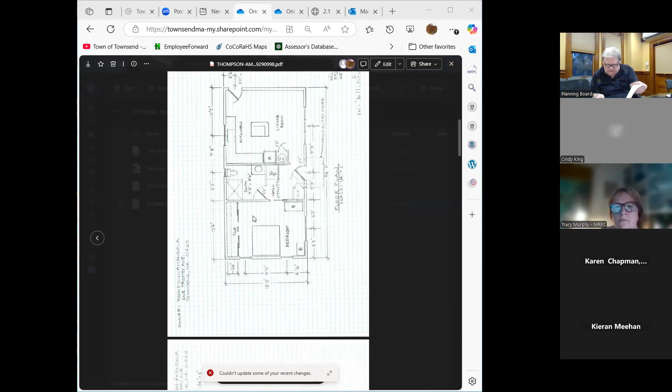Would you like one of them? I do have a copy here. He's only got the application. That's the plan, here, I'll give you this. I got the copy online.

This is probably the most useful one, you can talk about the driveway and all that. Is it an existing structure now? No, not at all, it's a new one. It's a brand new structure, yeah.

Outlined in the back pages there in red. The way we wrote the bylaws was that anything outside of the existing structure would come to us for review, to make sure there's good parking. But this was a detached unit. Detached, yeah. So Billy, if you want, just give us a little rundown.

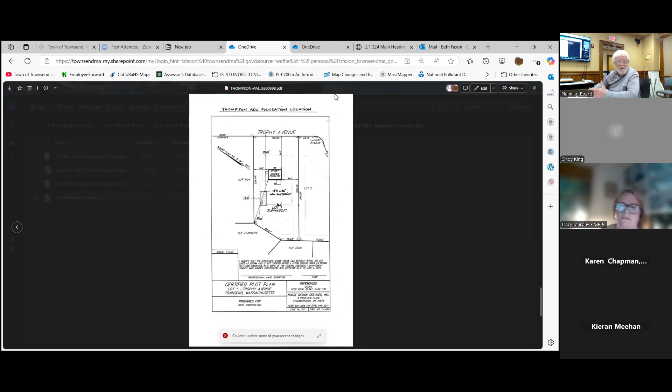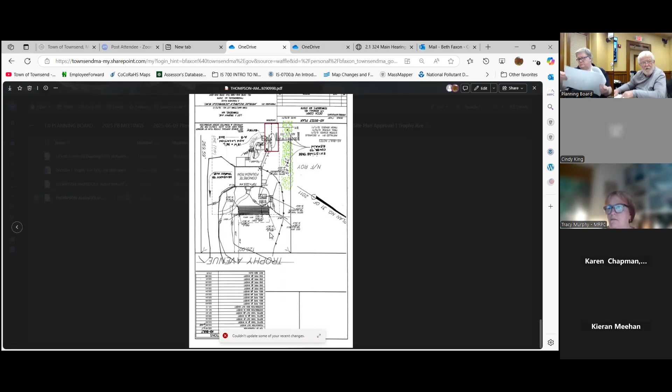I will. It's, you know, for an in-law, but there isn't those anymore. I've had a plan of attack there. We're gonna actually run the sewer into the basement to an ejector pump, which you can do if it's 25% or less. So this is a 4-bedroom septic, there's 3 in the main house and 1 in the ADU, so that all works pretty well. They've thought this out and that's where they want it. It's probably the least obtrusive place you could ever be. The next backyard is heavily wooded, and it's actually a house on Haynes Road.

This is, you know, Trophy Ave has like 5 houses on it, it's a cul-de-sac. The structure is 648 square feet. I think the main house is 17 something, and it's about, I don't know, 25%, not anywhere near the 50%. It's 1 story, it's got a kitchen/living room, a bathroom and a bedroom in it. It's on slab, no cellar. It'll be so well insulated, you can heat it with a match. No full basement, no, trying to keep the cost down.

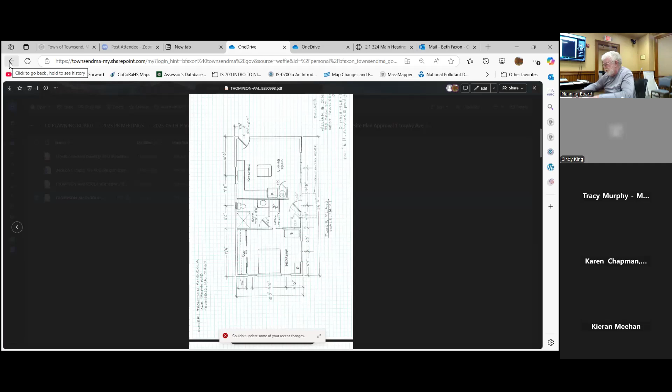I did Title V last Thursday, and that's all fine. The system looks good, it's not really that old.

Is it gonna match the style and materials on the existing house? Yes, the siding will be the same, it's vinyl sided. It's nothing too elaborate, but it's absolutely gonna be the same color and trim detail that the main house has. Well, I don't even see where it'd be visible from the roadway, actually. It really isn't. If you went by quickly, you could probably see the gable end, and then there's only a little narrow, open spot to the end of it.

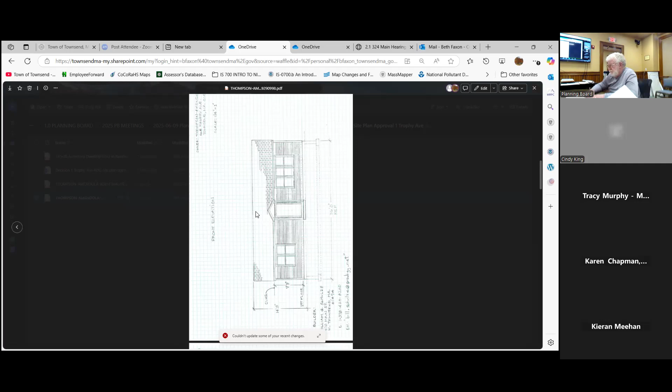I don't know, there's not a lot to it, this one. That's exactly what this is for.

Now, I know you guys are reviewing the plans in front of you, but Robert, do you have any thoughts or questions? No, I think this is what we were hoping to see happen here. Well, it's perfect. She couldn't have done a detached unit in the old rules, they had to be attached, and the maximum was 800 square feet. So we've actually been dealing with this since the fall, but with all the stuff coming through in January, we kind of put it off till spring. Sure, I see that it complies with everything we were anticipating.

So there are some questions about cover, towards the back of this there's ample wooded area. Cover, like making sure you're not putting it on top of somebody. Screening, trees. Okay, we have some pretty good natural screening there.

So you're on well water here? No, this is town water. It says right here, served by... I made a mistake on one of the forms. Beth just brought it to my attention. Okay, so then you're gonna contact the water department, so that's gonna be fixed. I don't know, it's kind of an interesting situation.

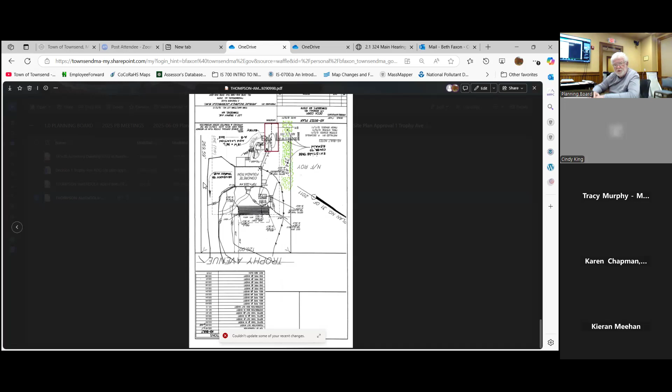I'm not sure how they do that. So the water comes into the house and then it's gonna be fed off the house. I don't really know how you'd... the well water or? Town water. Well, that's probably why it says, have you contacted the water department? I just wrote no, not applicable, because I didn't realize, I don't know how we're gonna do this. Well, this needs to be fixed. I didn't realize there was town water out there, because it says there's no town water.

And now you're saying there is town water? You said the application stated the property is served by... I made a mistake there, so it should say yes.

Okay, so we were talking about changing that. We got too busy so that needs to be fixed earlier on. And then if it's yes, then you need to contact the Townsend Water Department.

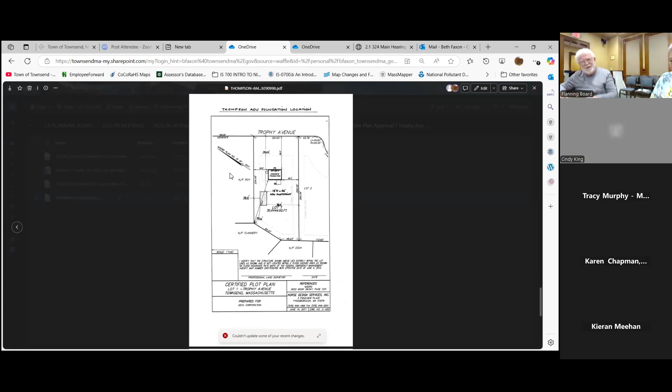I'm trying to figure out what for. Well, contact them and they'll tell you, since this is the first one. I don't know if they're gonna know. So the water line comes into the house, yep, and then it's gonna be fed into that addition. But the water department might have specific requirements of going from that house to the other house.

Well, there's other issues here too, because right now the new bylaw relieves this necessity kind of thing, and so now it's by right, so a lot of people will be using them for rental income. Yeah, that's true. In that regard, it's probably be beneficial for you to have separate water and separate electric on these units.

Because you could get into some legal issues with that. You can, although, you know, if you rent a place and you don't have the water separately metered, the landlord pays for the water in any apartment house. That would be true with electric too. That happens almost universally. I'm just making you aware of that.

I didn't anticipate that avenue. I'm absolutely gonna touch base with them, but I think they'd be pretty disheartened if someone told us we had to run a separate water line in so we could meter it. You know, that starts to shoot the budget out of the water.

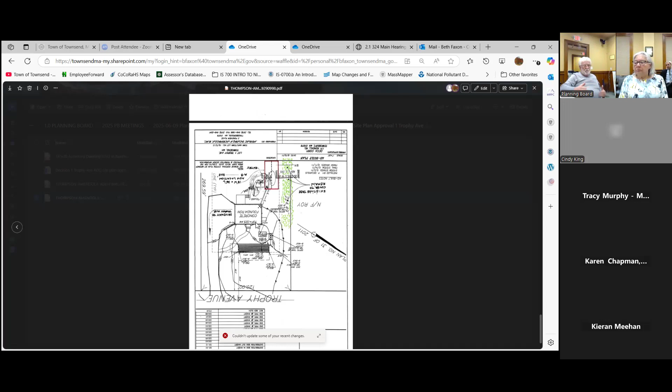So that's interesting. You come to another point, whereas they still have the same capability if they're attached, basement, addition, or whatever, but they're going to the same structure. I'm just not sure exactly. You'd probably have to separate it somewhere inside and double meter it, or sub-meter the panel. Well, a lot of this is beyond what our board can do.

I understand, I appreciate it. So, Hartley, any thoughts, comments, questions? No, I think everything here is covered. It's gonna tie into a septic tank.

I've never built a house before, so forgive me for this elementary question, but how thick and how deep will the concrete foundation be?

This foundation is on the smaller side. It's required to be 4 feet below finished grade for frost protection. So this is gonna be roughly a 4-foot high foundation with a 10 by 20 inch footing, and there'll be steel in it, and it'll be 8 inches thick. There's nothing less than that.

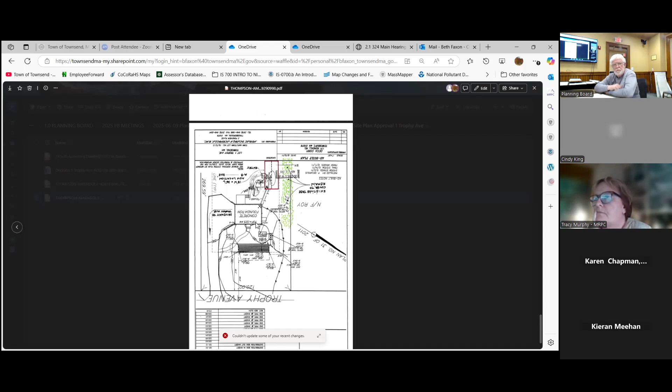I think we should move there. I think we ought to hear what Carol has to say. I just want this page corrected to reflect actuality. You can change it. Oh actually, I think I have your original here. Yes, and then just contact the water department for whatever reason you have to contact the water department for. I think this is the original. Everything's stapled together. This is your original, yeah. So if you just change this one, and then...

Adam, would that be something we could make as a condition, just contact the water department? Yeah, you can, it's actually not even a requirement of your bylaw to begin with. It's just on the application form as sort of a flag to let the applicant know that you've got to contact the water department because you have to work on water service, much like sewer service or septic. But there's no harm in making a condition to contact the water department, that's fine.

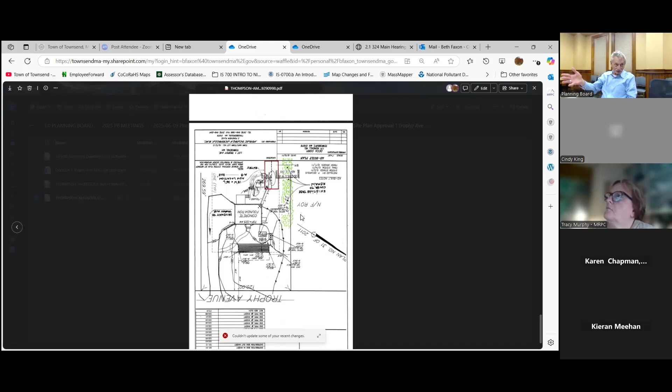I would think of it if we were coming off the street or something like that, but I didn't even... well, like it's been brought up, it's a significant cost to do that. And if the landlord bears the cost of the water, and like Adam said, it's a secondary accessory unit, so it's really related to the main property, so that's totally up to them. We did have a 2-family and they were selling laundry services out of it.

So what about parking for this? Do you still have the site plan there? I think there was... so it's required, there's one. There's a 2-car garage underneath and then room for at least 2 or 3 cars. So we're anticipating 3 cars right now. It should be ample. Total for the property, 3-car total? No, I'm saying you could fit probably 4 to 5, but we only have 3, so it's not an issue.

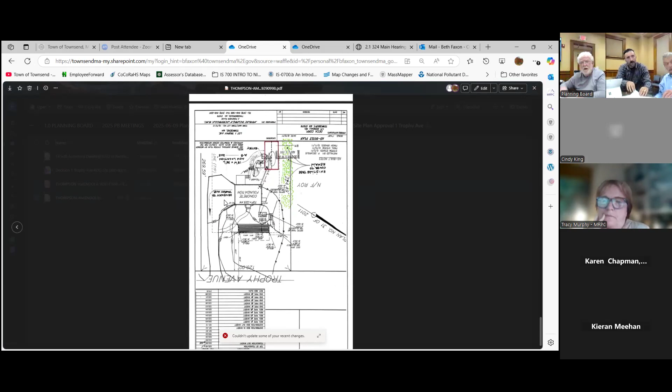This one might be the one you're looking at. And how long will the driveway be? No, we're not touching the driveway. It's already in, 100%. There's no changes to the existing driveway. That's the unit, right? That's the proposed.

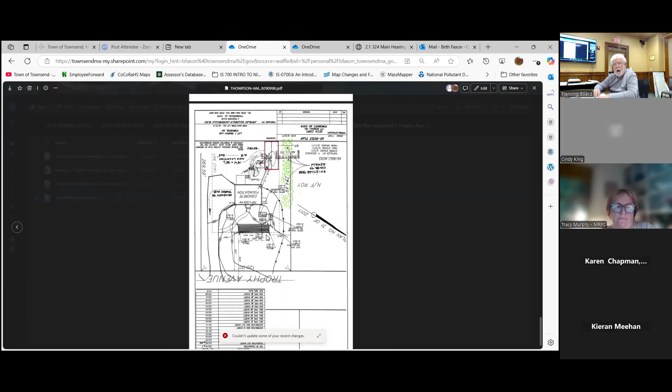Well, it doesn't really say, it doesn't really show where the parking would be. Well, I think I wrote in the application there's a 2-bay garage under, so that covers the main house, and then you got room for 3 more cars out there, but you're only gonna need 1. I know, but we don't know where they are.

Bill, do you want to come around and show Robert on the screen? There's 2 on the inside there, and then there's room for 3 cars there, but there'll only be 1 in this area. The driveway comes in narrow and then expands out.

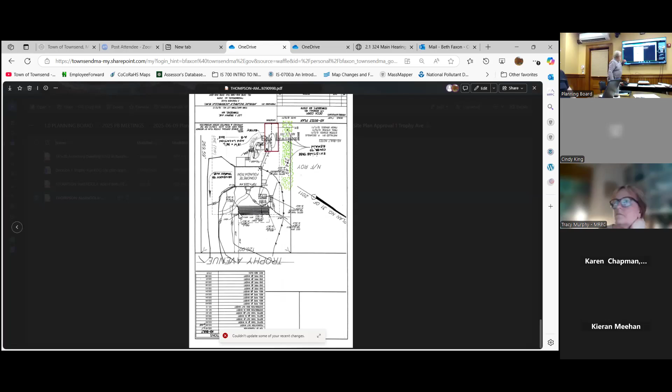And there would be no new driveway up to the unit? No new driveway. He's gonna do a landscape walkway up there, that's their plan. I think there's already a walkway out to this porch, and then it's like adding 20 feet from there. I'm not sure how proportional it is, but that driveway looks bigger than the existing house. So there's two inside and then room for 3 cars outside, but there's gonna be a total of 3 cars there.

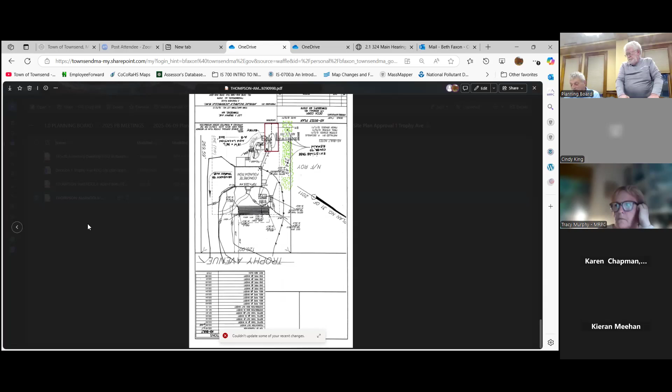Well, I should have brought a daughter. I tend to think that if whatever works there will work, but I think henceforth we should probably have parking shown on these drawings. Maybe make that a section of the application to include. Sure, I'm sure it's gonna change over time. Well, the thing is, you're our first applicant like this. That's all right, it's my first one detached, I've done many under the old regulations. So in reality, these things work out just between the occupants of both buildings usually, but you know what, the biggest thing I'm trying to prevent is a problem, that's what we can try to do here. All right, thank you.

Okay, Hartley, any thoughts or questions? No, I think it's pretty well explained, thank you. Sure. And Carol, yeah, yours was the one.

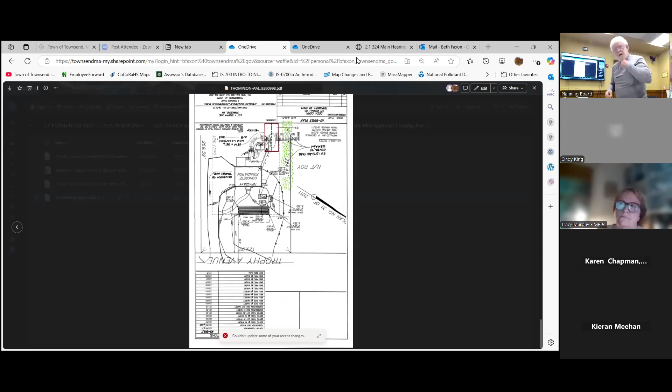I'm good. Beth provided a draft decision for us in the portal. Given our discussions, where did we go? I added a section that says under the conditions, the applicant will contact the water department. It's pretty bland and straightforward. Whatever they work out, it's outside of our purview. Well, right, but yep, that's fine.

The other conditions are somewhat similar to the last decision we had. Condition A: all exterior lighting shall conform to Article 9, Section 145-52, Article 10, 145-60, and any other applicable lighting requirements of the Townsend zoning bylaw. Condition B: the applicant shall obtain and submit to the building commissioner a written report of the Board of Health explaining that the changes, if any, to the existing septic systems or the existing and proposed units conform to the requirements of the state sanitary code, and have been agreed to by the applicant. Part C: the project shall adhere to the applicable zoning bylaws, planning board rules and regulations, and any conditions imposed by the Board of Health, the building commissioner, and all applicable local and state environmental agencies, otherwise waived.

Section D: any accessory dwelling unit intended for occupancy by a person with a disability shall be subject to the provisions of MGL C40A, Section 3. And then E, the applicant will contact the water department. I don't know if it's necessary to address the disability component there. Even an occupant that's not disabled could become disabled later on. So I think we just leave that alone.

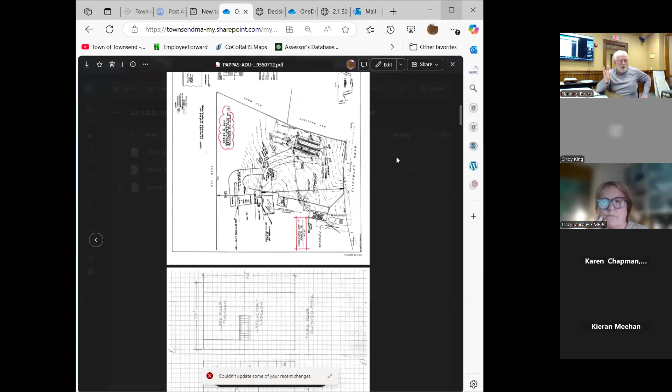So she's pretty intent on getting going, and we started this, I think the permit was in October. Speaking to Bob Garside, there were a lot of things coming down at the end of the year. The letter was supposed to come back from the state of Massachusetts on September 1st. Well, it did, and they asked for 3 more months to review whatever. They didn't do it till January. They passed the law, so we built it as an addition, and we just want to put the kitchen in now, basically. So this is the existing unit, we built this house for the Pappases. They own Patriot Pizza, yes.

We built that for them in 1994. That's their house now. Where's their current driveway? The current driveway is all right in here. And this is the ADU unit going in the rear of the property.

What will happen is, once again, there's 2 garage bays under here. There's parking here. The ADU has a single bay garage under, and then she wanted access up to a more convenient first floor if eventually she should need it. So I would say this has 7 spots in it, and there's probably 3 cars there now.

This, starting right here, this is the all new proposed driveway. We're just grading that out. There was a lot of ledge in there. We have to jackhammer some of it out.

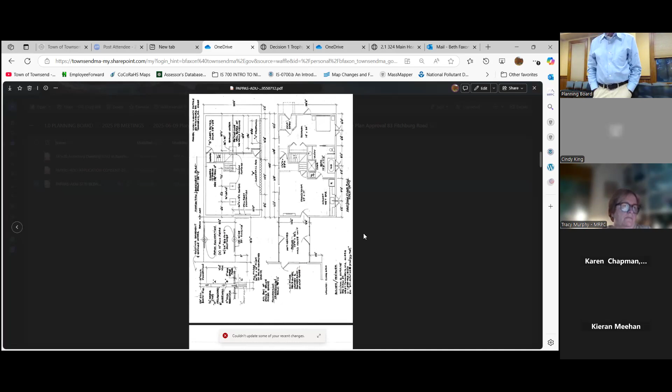All right, I just want to advise the board here that we're looking at a schematic design. You understand that? Right, so it's a conceptual design, and there's no professional engineering being done here at all. From what this shows, it would seem everything would work, but there's no assurances that they will. Okay, so that was my comment.

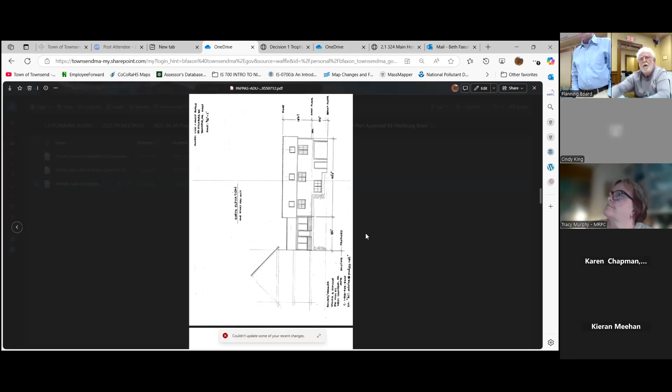In terms of the construction of the unit, well, if we were talking about a new building on a lot, we'd be expecting more, you know. It's an attached addition though. Oh, I agree, yeah. So I don't think—personally, it all looks like it'll be fine. So I don't know how comprehensive we should be expecting these to be.

And again, whatever doesn't work well, it'll be the burden of the owner, I would think. But I just wanted to make everybody aware of what we're looking at and that it's a conceptual design. So we don't have the advantage of a regular professional layout where we could talk about setbacks and the porosity of the soil and lot coverage and all those other topics.

I did lot coverage on there. I can see it's probably very— No, I did, yeah, I think we did. So this is kind of a challenging thing, because the whole purpose of this is to try to get some affordable units in our town without burdening the owners with a lot of other stuff. But we can see the downside of that here.

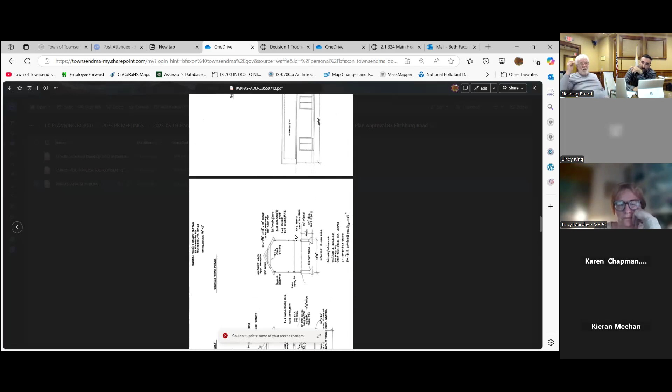Okay, that's current. Sure. The only thing I'd say is that everything we do here, every addition, has to go through the building department. He has a whole layer of scrutiny on setbacks and, I mean, it's not like no one's looking. No, but the planning board has a different level of review.

Sure, I understand. So I think it's a great thing, and just like the other one, this is exactly what we're trying to accomplish here. Right, no, I understand your point, that now that we see two of them, it gives us an opportunity to see what we're doing, and what we should or should not be considering, or to what level of comprehensiveness we want from the applicants.

So, in other words, if this was a brand new building and a new project, we would have seen the driveway, what's existing, what's new—there'd be information on the type of roadway surface and stuff like that. I guess my question would be, playing devil's advocate, if it was just a single lot in a new house, it wouldn't even come to the planning board.

That's true. Go to the building department, it would be up to them to scrutinize. That's a good point. I think right now, with Billy's expertise in town and all the buildings he's constructed, and the package he put together, this might be a luxury for us compared to some future cases.

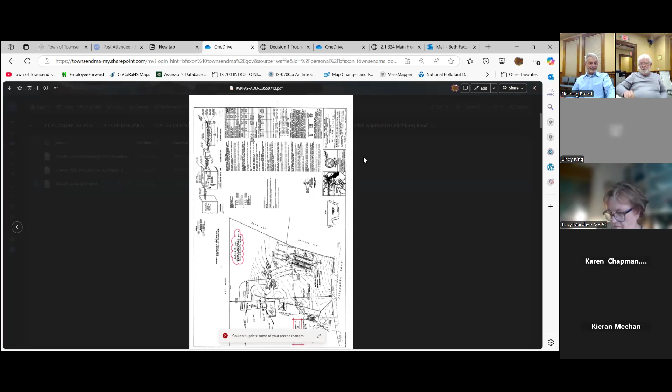Some may, this is exact, in the manner in which we did it, it's kind of like an as-built. So, well, anyway, that's what we're doing. Hartley, any thoughts or comments? No? Okay, it's good to me.

I think the biggest thing is when somebody comes out and the neighbor comes and says, 'you allowed them to do what?' You know, so these have such ample coverage and tree line — we took down a bunch of trees here, and there's still a 60-foot tree line to the next neighbor. Nobody's gonna have an issue. A lot of people don't want to view their neighbors any more than the neighbors want to view them. Well, but everybody has needs too, so.

Yeah, that's for sure. And again, I think the more activity there is like this, the more people will be doing it as well. Yeah, once they figure out that they can do it.

Okay, so we don't have a draft decision, but I think we could probably go off the similarity from the previous draft decision we had from Trophy Ave. If that's okay, yeah, we can keep it pretty much the same. Sure, yeah. So shall we? As we say in the business, the same thing, only different.

I move that we approve this — have a motion to approve this, 83 Fitchburg Road. In reflection, it's similar to the previous decision, and would move it for a vote. Second. Harley seconds. All those in favor? Aye. Aye. All right, you're all set. Thank you. Thank you very much.

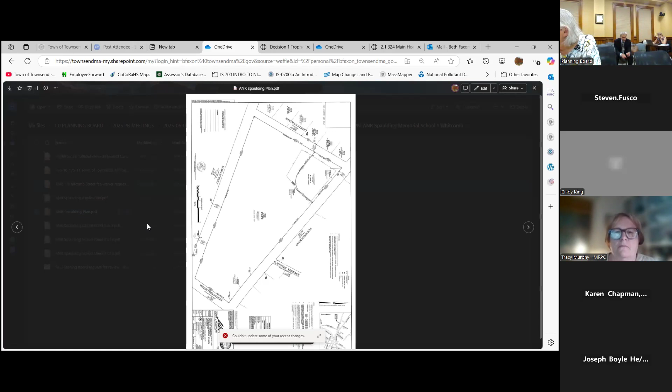And we proposed — we submitted an ANR plan with the surveyor to subdivide the property, in order to have it be a standalone parcel. And this is where the playground already exists behind this, correct? Yeah, so there's an existing play structure right there right now.

And the project is to demolish and remove that and replace it with an up-to-date composite play structure, and also put in rubberized safety surface.

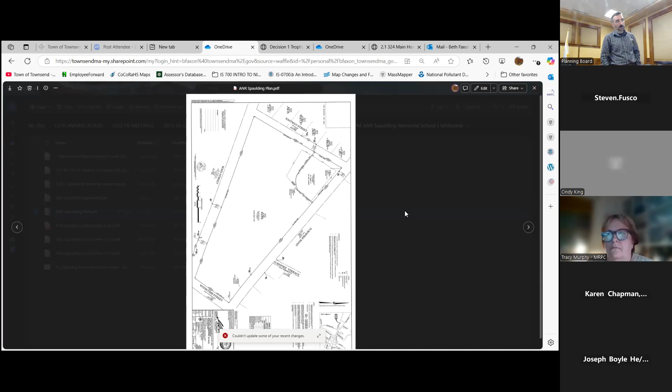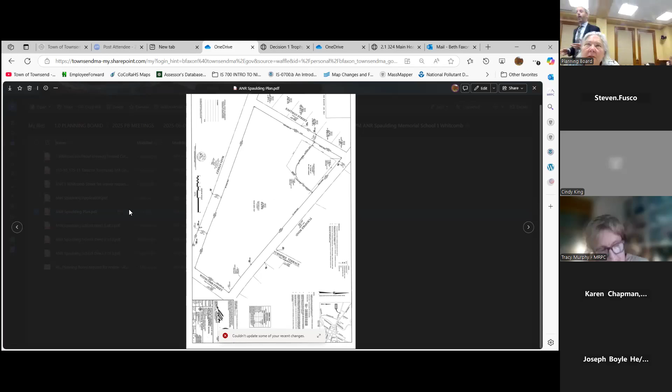Was there a specific reason why the parcel had to be separated? Yes. The project is funded through a park grant, and park grants cannot fund improvements on properties affiliated with education uses. And if I can add, there's actually an added complication: the park grant program requires, as a precondition of accepting the grant monies, that you place

a permanent restriction on the property that it'll be used for playground purposes in perpetuity. Well, the property as a whole, as it exists today without this proposed ANR division, is a school property. You're right, how can you say it's going to be used in its entirety for playground purposes if it has a school on it? I got it, so you need to find a way to carve off the portion that's being used for playground purposes. Well, this is a little complicated because I'm on cemeteries and parks.

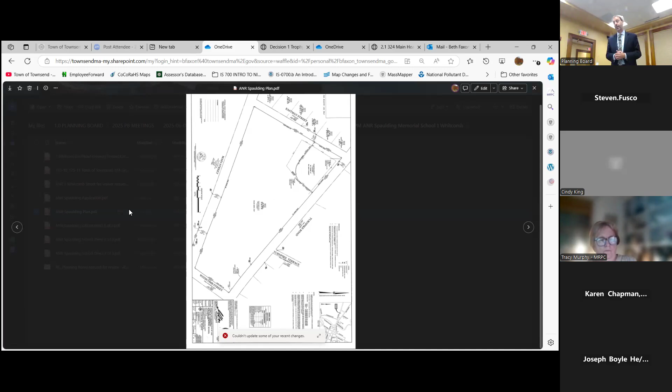And currently we maintain that property. Is that still gonna happen? I think it is, I don't think really anything is gonna change. I think this is more to paper the trail, because you might recall there was an article on the town meeting warrant - it might have been 2 specials ago - to accept the grant monies and to provide additional funding, and to accept monies volunteered to the town through residents and fundraising efforts for this playground project. But the park grant's a big piece of it.

Well, I also understand this has to be all put together before July 1st, is that correct? Correct, the money has to be committed prior to July 1st under the grant program. So we gotta move fast. We're sneaking it under the wire.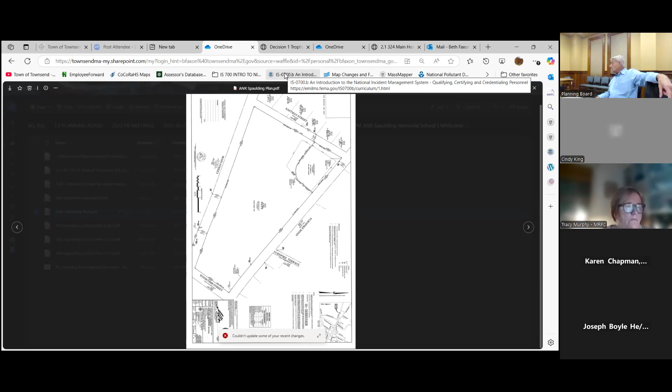There was one discussion here from cemeteries and parks, which we have been maintaining and redoing and preparing for all the new equipment that's coming. There was an oversight in the grant to make the park accessible in terms of parking and wheelchairs. So we don't want to lose the funding we have, but that's something we'll have to come up with another way to address. I thought this whole grant thing was to make this an accessible playground. It was, but it ended up being in the grant proposal - nobody considered access to it.

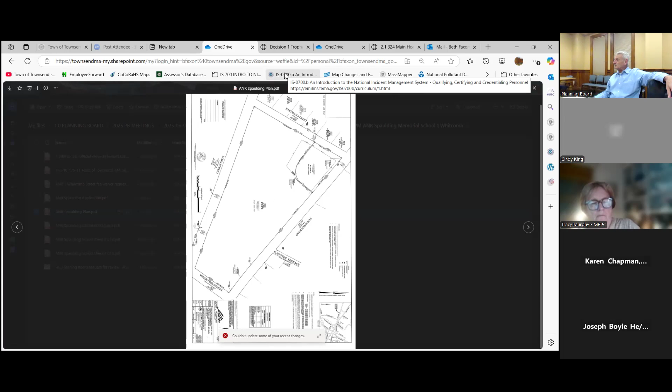Okay, so technically that's outside of us subdividing the lot. And to be really clear, it's not even a subdivision, right? Because it's an approval not required. Sure, and it's really the simplest kind of approval not required, because it's only creating one buildable lot that already exists today, since parcel B is marked not a buildable lot.

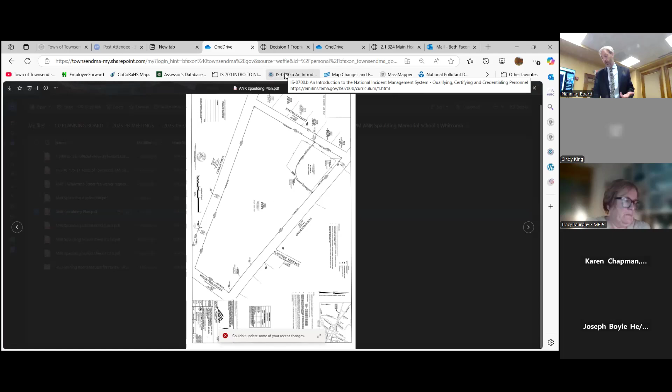It's gonna be a lot for a playground. Okay, so all it's really doing is carving off a parcel from the larger buildable lot, which already has a structure on it and will remain a buildable lot. I'm willing to go forward with this, get it out of the way.

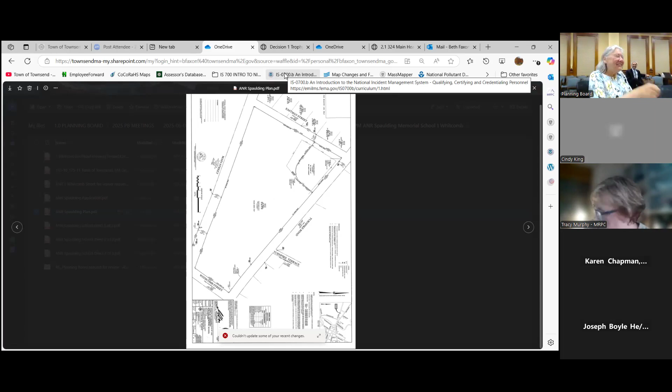Yep, Hartley, any comments? No, I think it's laid out pretty good. I make a motion that we approve the subdivision plan that's been presented. I'll second. Yeah, it should be that the board endorse the ANR and grant subdivision approval.

We also need to make a motion to waive the filing fee, because it's a municipal project. Check out these two motions and consider reading them out loud. I make a motion to waive the filing fee for the 1 Whitcomb Street ANR as required, written as the purpose of the action is for a municipal project, which is a handicap playground.

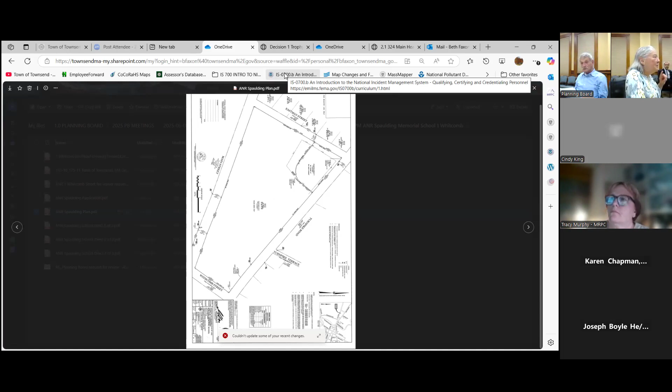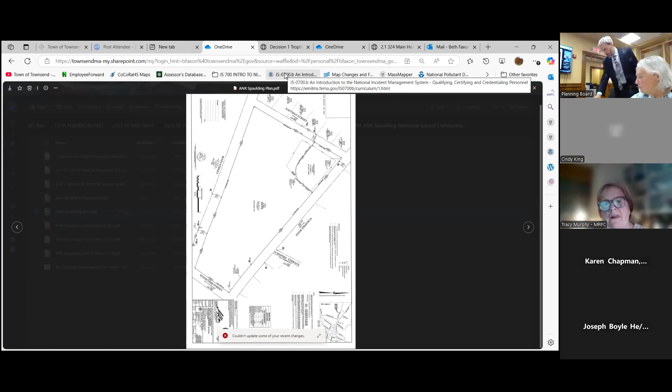I make a motion to the planning board - let's do one at a time. I just had one question: why is it called Whitcomb Ave when it's on the corner of Eastman and Turnpike? I think that's just a label. Because this is one property today, it's all the school property, so it takes its address off of it.

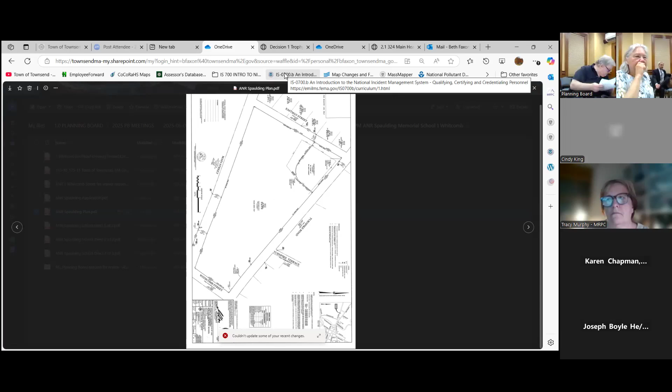So you need to have a second, then a discussion and a vote on the waiver. I make a motion, as I previously read, for 1 Whitcomb Street, for this new playground, separating the lots.

So we got to back up a second. We're doing the waiver right now. Let's just have you do it, because it got a little complicated. We'll read the waiver motion, have discussion, then vote, and then we'll do this other one as well, which is the one you did.

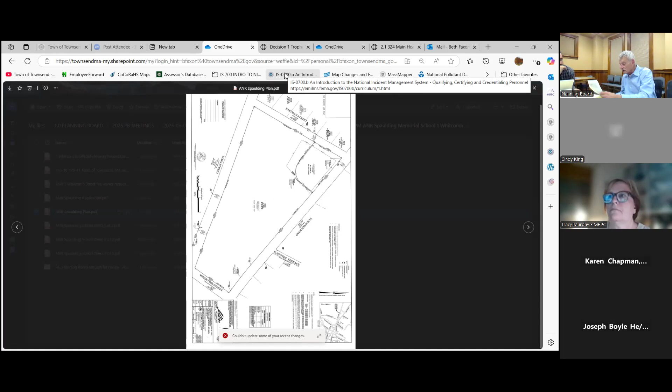I make a motion to waive the filing fee for 1 Whitcomb Street ANR as requested in writing, as the purpose of this action is for a municipal project, which is the playground. Second. Any discussion? All those in favor? Aye.

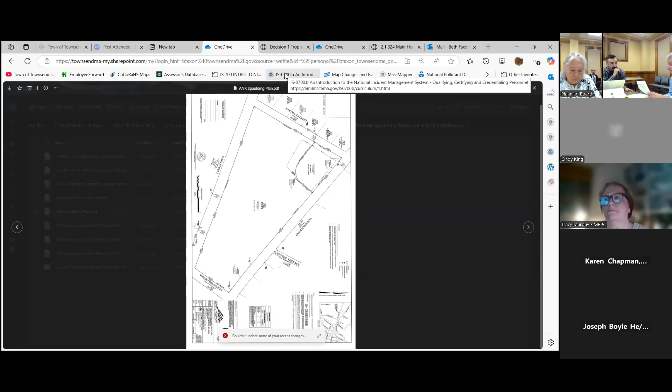I make a motion that the planning board endorse the ANR presented for number 1 Whitcomb Street. Second. Any discussion? All those in favor? Aye. Motion passes.

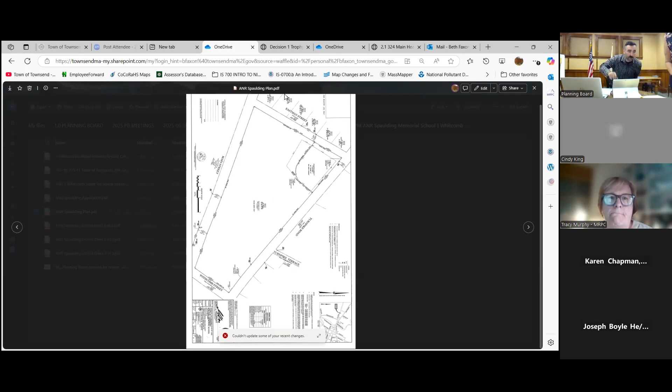So Tracy, welcome. Hold on one moment, can we sign these now? Yes, please, I'd like you to do that. Tracy, we're just going to sign these plans and then we'll get to you. There's one more here.

This one is you. Are you just doing a Mylar? You want to do all of them? Yeah. So these are signed, I know it's a lot. Do you want to do the one with the pen over here? Well, why don't we just go right through all of them?

Let him—okay, he can only sign the new one, but not all the others. All right, so I'm using this pen, Hartley. Catch up, good idea. I was going to say, are these all mine now? No, just one Mylar, and then the rest use the pen. Yeah, there you go. Perfect.

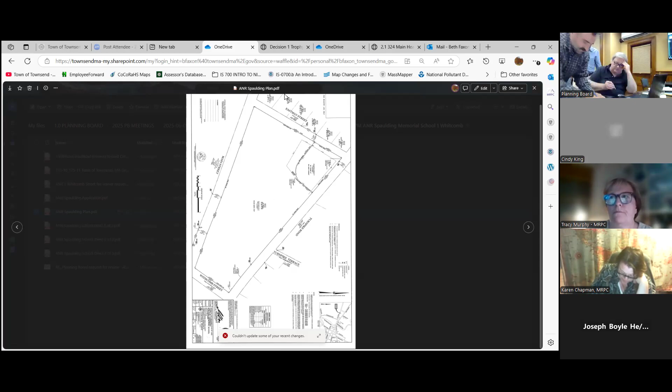And you can't just put an X, Robert, you have to sign your name. Yeah, I'm gonna get that all, man. I get some stamps. Hartley, good luck. Thank you. No, not with that, with the pen. Oh yeah, that'll bleed through. This one's for the Mylar, and this is for the pen. That's all right, this is your first time.

Okay, so while everyone's signing, Tracy, if you don't mind, give us the rundown of where you're at. I know you've got a lot more on your agenda, so I won't take much of your time. I just wanted to touch base about the Economic Development Forum coming up this Saturday from 10 to 12 at the library. As of today, we have 23 people that have taken the survey.

I have some different posters that I'm going to put up. The format for the forum is going to be two separate groups: one will be discussing logo and slogans, and the other group will be talking about the strengths, weaknesses, opportunities, and threats in town. Beth, I don't know if I can share my screen.